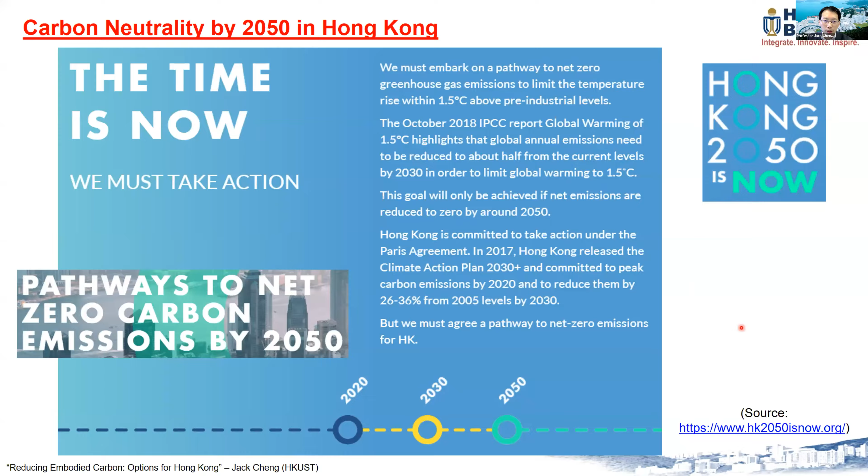To start with the topic, today we have many good speakers talking about different aspects of embodied carbon. But why are we interested in that? Many of you already know that we have a target to achieve carbon neutrality by 2050. In China, the target is 2060, so we are 10 years ahead and more aggressive. We also target to reach peak emissions by 2030. If you want to know more about the carbon neutrality mission in Hong Kong, you can go to this website.

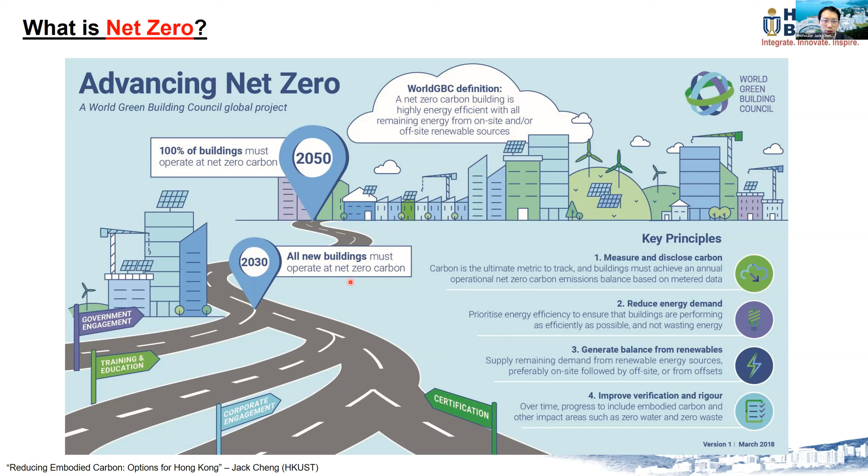This kind of carbon neutrality target or initiative is not only in Hong Kong or China—it is actually a global need, a global trend. If we look at the World Green Building Council, they have the theme of advancing net zero, with a target that by 2030, all new buildings must operate as net zero carbon. But when we talk about the whole life cycle, this is also something we need to consider. When we talk about carbon footprint, we need to look at the whole life cycle rather than only the operational carbon. What is embodied carbon? What is operational carbon?

As the first speaker today, I would like to mention that for the whole life cycle, from design to construction to facility management, embodied carbon is the carbon footprint arising during material use, raw material production, and transportation, while operational carbon is about the carbon footprint during the operation of the building.

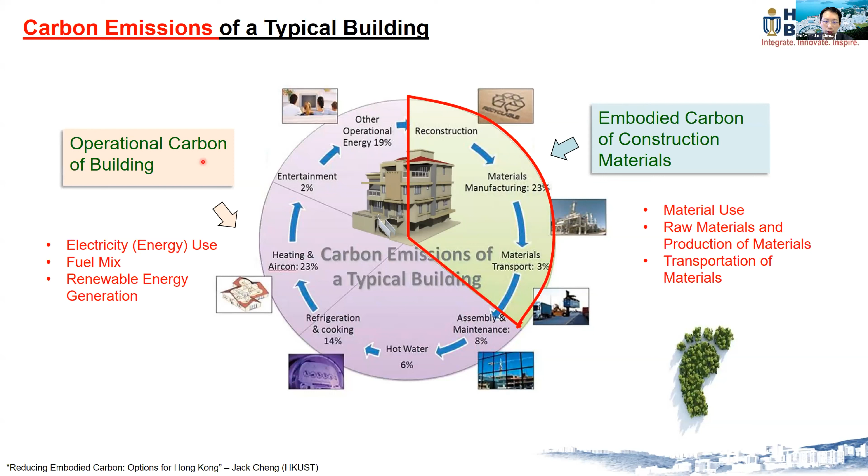If we look at another definition of the whole life cycle, we can see categories A, B, and C. A is mainly about design and the upfront stage—this is what we call upfront embodied carbon, including raw material, production, transportation, and even site work. B is the operation stage. And C is about end of life—deconstruction, disposal, etc. Those are also embodied carbon, but this is not our target. Our target is mainly the upfront one.

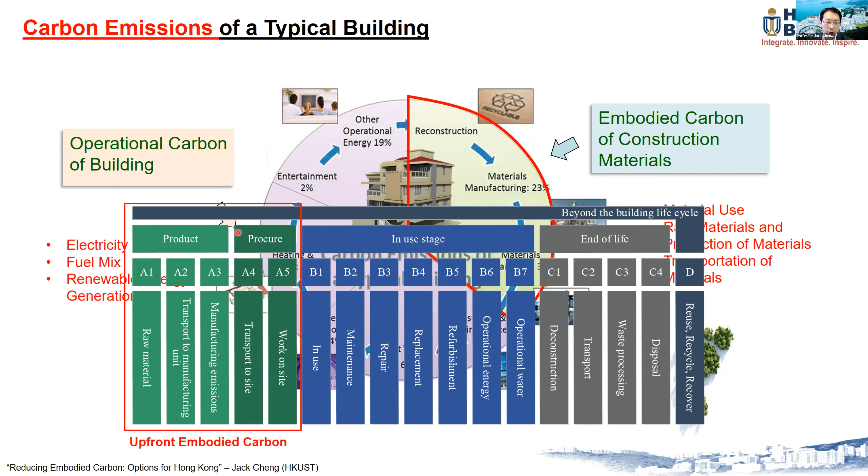That's why today I would like to share with you options to reduce embodied carbon, mainly in this scope, A1 to A5. Why are we interested in embodied carbon? If we look at the whole life cycle of a building, embodied carbon during construction would contribute about 27 to 47%. It really depends on many factors, like the construction method, etc.

But at the same time, many people try to focus on the operational carbon, how to go green, etc. But in fact, if we consider some buildings in mainland China, maybe the lifespan of a building is only like 30 years. Then in that case, the embodied carbon will be very important, almost like half. Even for a typical building like 50 years, 30% of the life cycle carbon footprint is still very important, and we shouldn't ignore this.

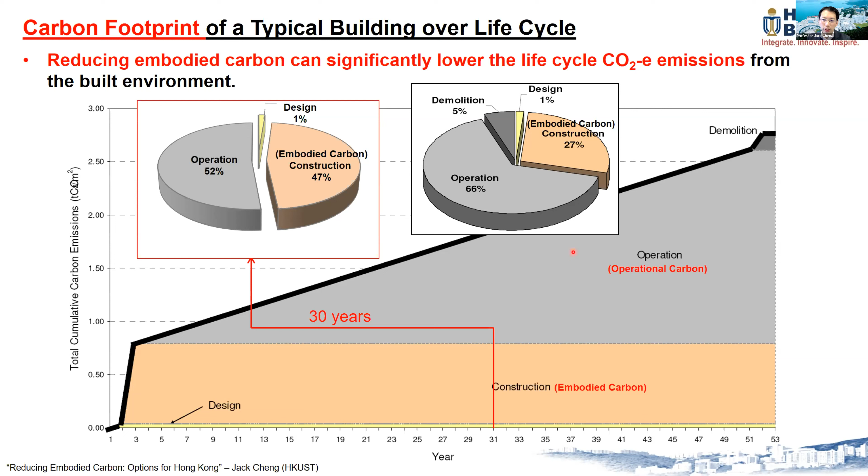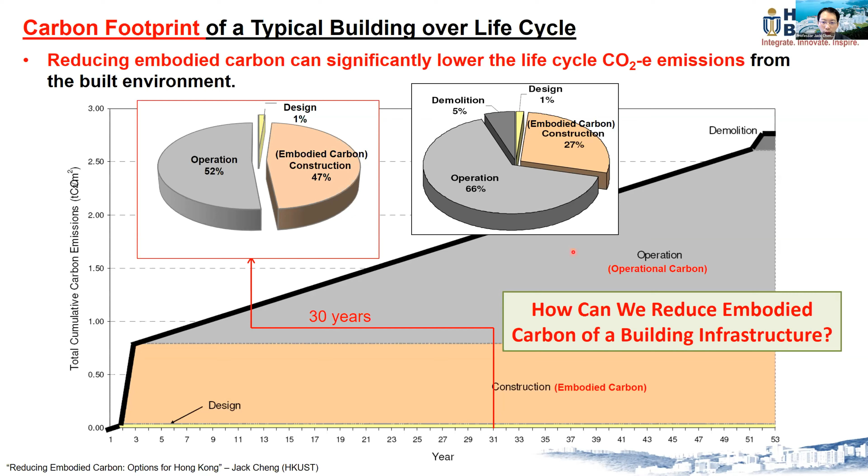So the question is, how can we reduce the embodied carbon of a building or building infrastructure in general, even like bridges or roads? What can we do? In the following, I would like to share with you some options to reduce the embodied carbon in 3 main areas: building materials, building design, and the construction part.

So first of all, I would share with you about building material. I know later there will be other speakers talking about that. For our construction of buildings, the main building materials will be concrete and steel.

For concrete, there are many methods we can use to reduce the embodied carbon. Particularly, for example, we can design the mix, the concrete mix, so that we can consider the workability, the strength, etc. We also can add cementitious substitution material, particularly fly ash, GGBS, or silica fume. Each of them has different limitations, and also supply shortage or supply constraint considerations. But they also have corresponding limits on the maximum use. For example, fly ash, we can use up to like 25-35% only.

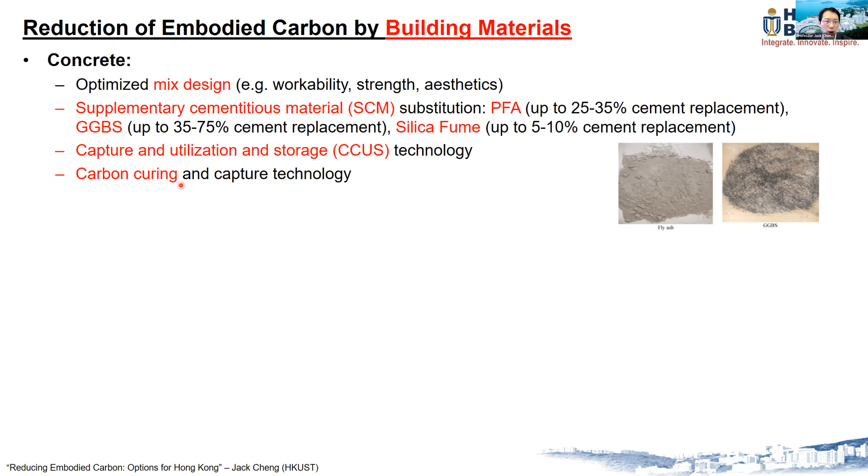GGBS, we can use more. So that's why if we push the limit and use the maximum GGBS, we can achieve a lower carbon concrete. But of course we need to consider the material properties, etc. There are other technologies, for example, CCUS, carbon capture, utilization and storage, and also carbon curing technology, which can also help us provide better concrete.

Another thing for steel, we usually compare EAF and BF-BOF. Particularly if we use EAF, the electric arc furnace, the embodied carbon will be smaller. Also, one way to reduce the embodied carbon of steel is the recycling content, and this depends on our procurement.

Another option is using timber. In Hong Kong, concrete and steel are the major building materials, but there's a rising trend that we can use timber combined with steel to have a composite building component, so that we can use it for partition walls, etc. This is something we can consider because timber has zero carbon footprint since it comes from nature, and this can help reduce the carbon footprint of the entire building as a whole.

All these are different technologies on a single material, but for Hong Kong, we don't have too many options or methods to reduce the material itself, because we don't have factories, we don't have manufacturing. For concrete, for cement, there's only one cement supplier in Hong Kong, but for steel or other materials it's usually imported. So the problem is how can we consider this in procurement?

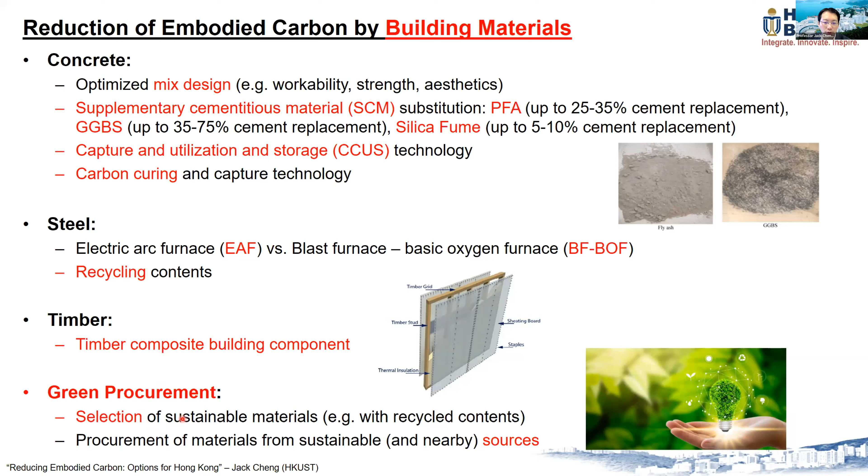So green procurement is more important. We need to know what's good, what's not good, so we can select materials accordingly and also consider the sources. Let me give you one example.

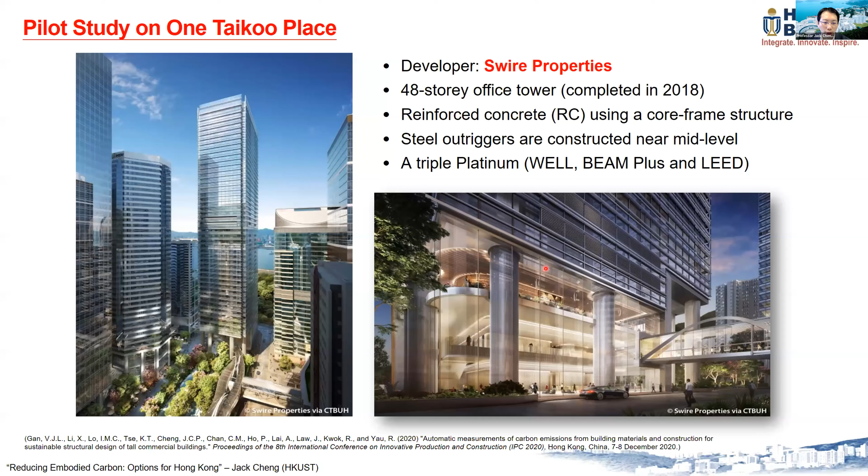We worked with Swire to calculate the embodied carbon of one commercial building called One Taikoo Place. This is a green building with platinum certification. We tried to calculate - it's an RC structure with a core frame structure. When we calculated the embodied carbon, we found that materials contribute 96%, among which transportation contributes about 5-6% of the embodied carbon, and concrete contributes 30%. Rebar contributes 52-53%, so all the steel altogether contributes about 56%. Then glass and timber make up the remaining.

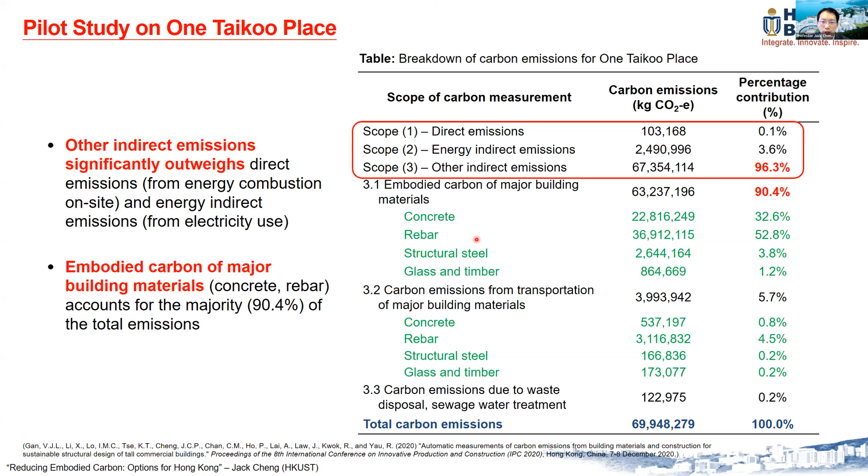We can see that's why if we can reduce the carbon footprint of concrete and rebar, then we can really reduce the embodied carbon of the building.

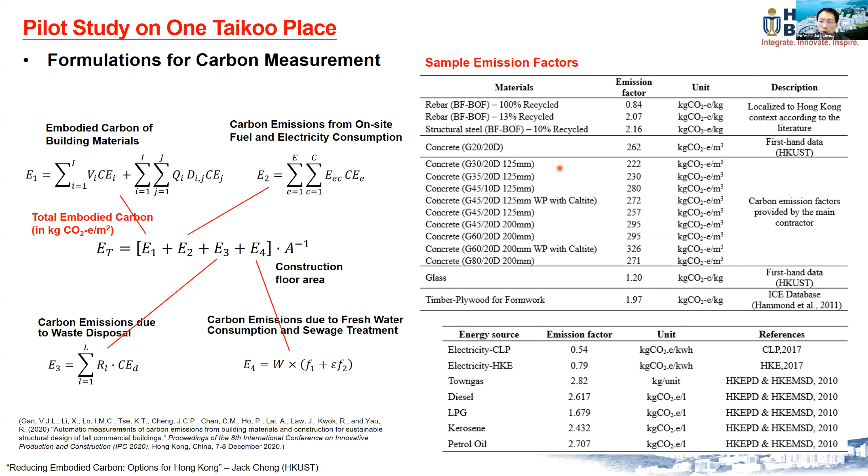These are some more information about the emission factors that we use, and we actually consider the local embodied carbon emission factor. This one shows that if we consider recycling of steel, and if we consider fly ash and GGBS, then we can have some reduction in the embodied carbon.

For example, the current design number is 575 CO2 equivalent per square meter. If we use 35% fly ash, then we have 11% reduction. If we use GGBS to the maximum, 75%, then we can achieve 21% reduction. If we use 30% recycling, we can reduce 4%. But if we go to 100% recycling of steel using EAF, then we can achieve 34%.

If we do both, then basically it's the sum of these two numbers. So this shows that if we try to select or use low carbon material with the same design, then we can achieve almost 50% reduction for embodied carbon of a typical building. This is something for us to think about.

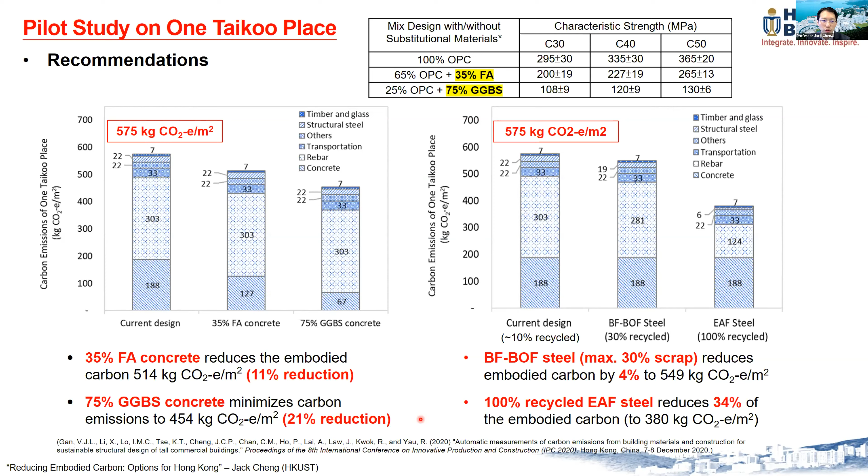And with that, digitalization can help. Later, I will show you some examples.

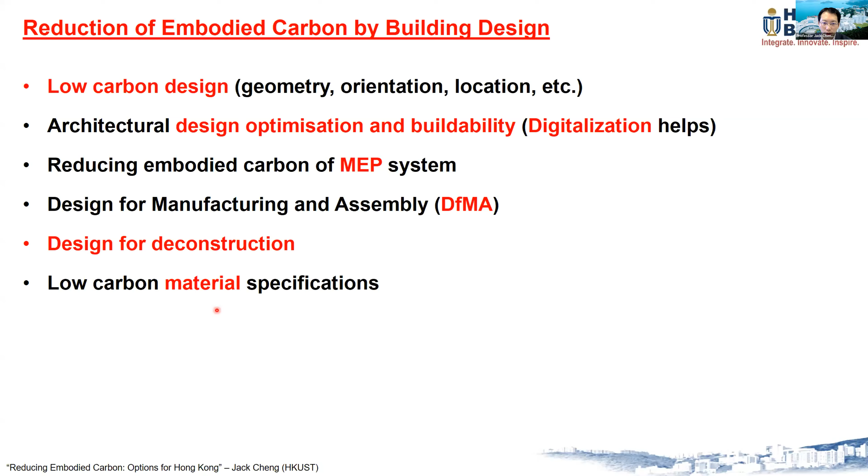Particularly, I want to share with you how digitalization can help us have better design. I think many of you may have heard of building information modeling, BIM. With a single building model, we can support different analyses, for example structural design, ventilation design, material design, etc.

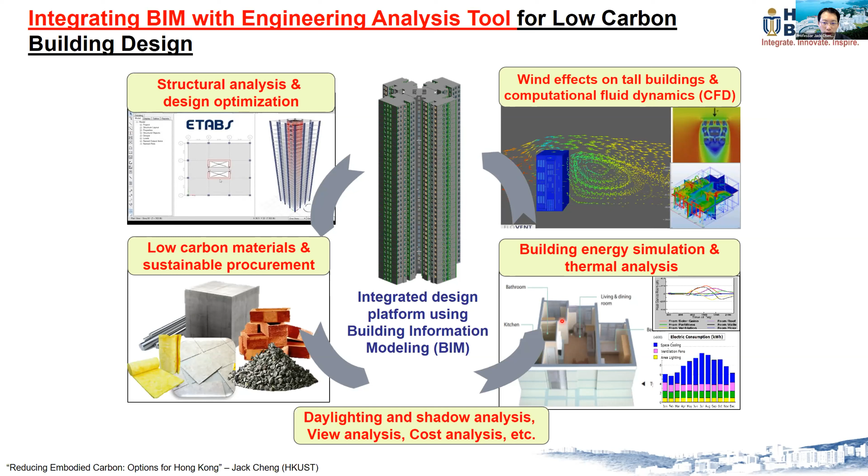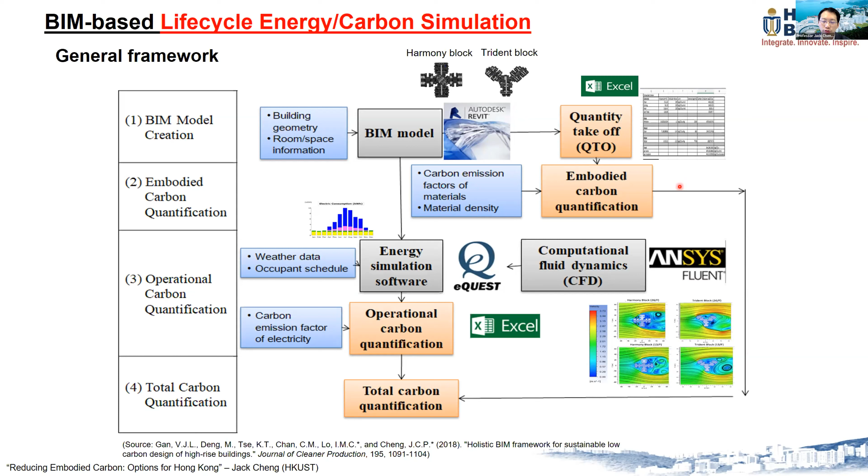We have studied this using a single BIM model, and we consider the embodied carbon and also the operational carbon, then we can have total life cycle carbon optimization. For embodied carbon, the approach is that because BIM is object-based, we can know the amount of different materials, for example concrete, etc. With that, we can do the quantity take off and consider the emission factor, then we can know the embodied carbon.

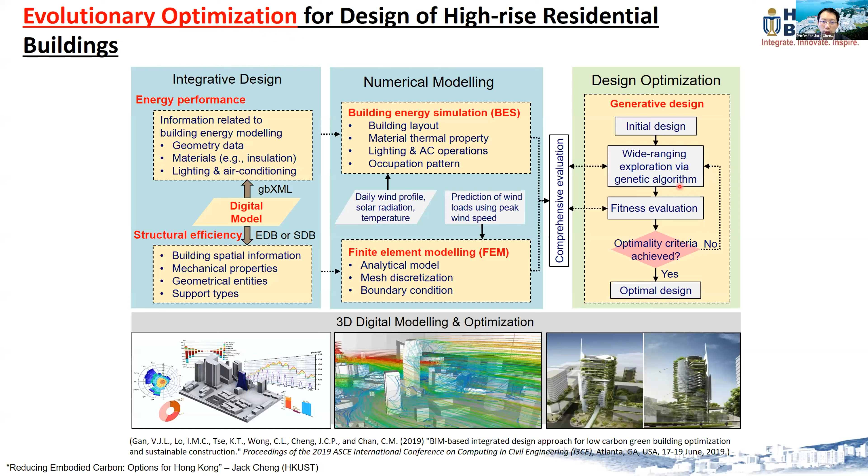With that, we can consider this as the objective function and do some generative design, generating many different alternatives using parametric modeling. For example, we can have different permutations and ask the computer to tell us what will be the embodied carbon for that design. We try to select the best one with compliance to code and also the requirement of payload, etc.

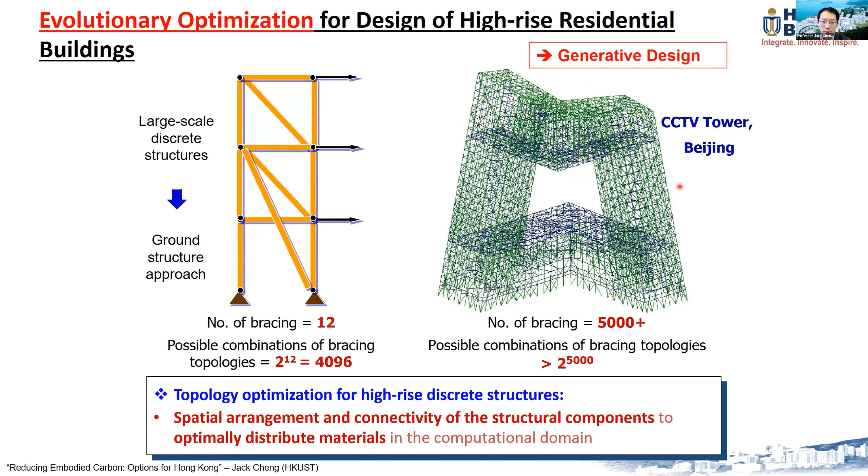With the BIM model, we can also consider different materials. For example, we can select different low carbon concrete, with different materials. For concrete, we have C30, we have C60. C60 has double the strength of C30, right? But in fact, the carbon footprint is not double. So if we use high strength concrete, even though we double the strength, the carbon footprint actually is less than double.

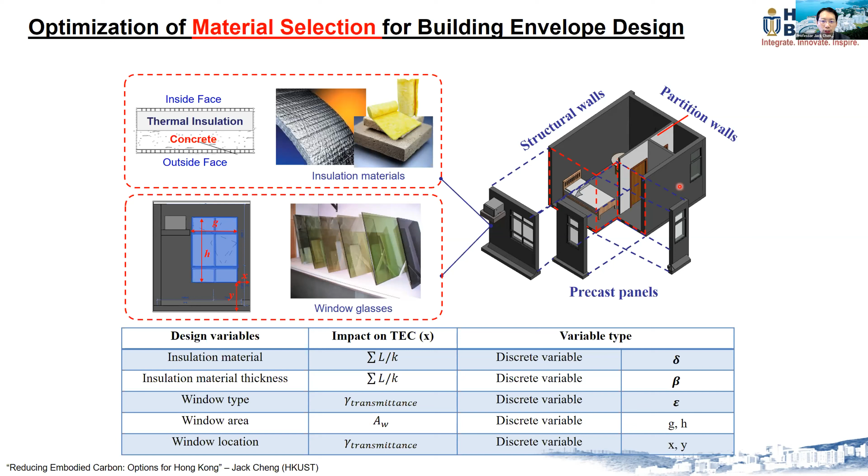It means that with this consideration and this model, I can consider using high strength concrete and then reduce the member size—what will be the changes in the embodied carbon? Digitalization, or this digital model, can allow us to do this kind of assessment.

Another thing is when we do the design, we can consider, for example, what are the partitions, so that I can still have the same structural strength and performance for the building, but use fewer materials, fewer partitions, etc. With better design, I can reduce the use of material, and in a sense, reduce the embodied carbon.

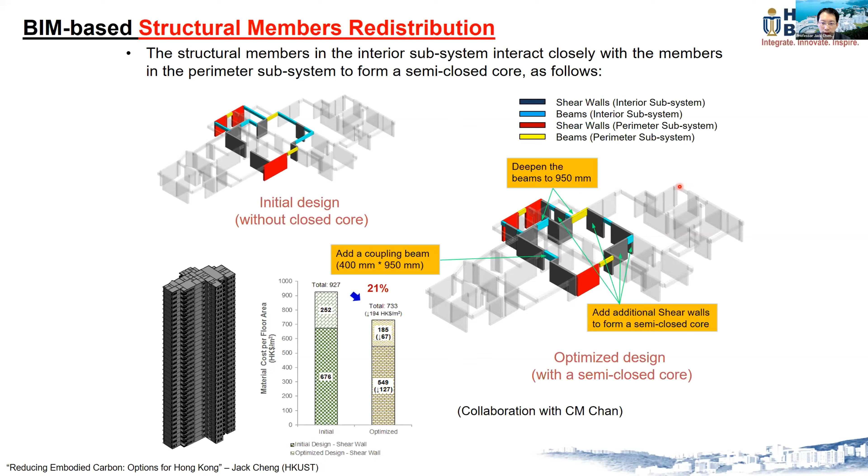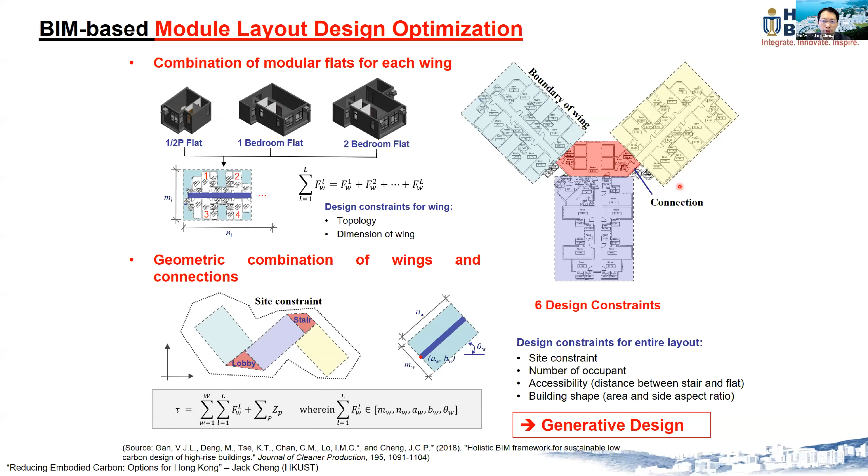We talk about modular design. So our team also tries to consider the selection of the module, the orientation of the module, so that we can have better ventilation and also fewer materials used, and digitalization can allow us.

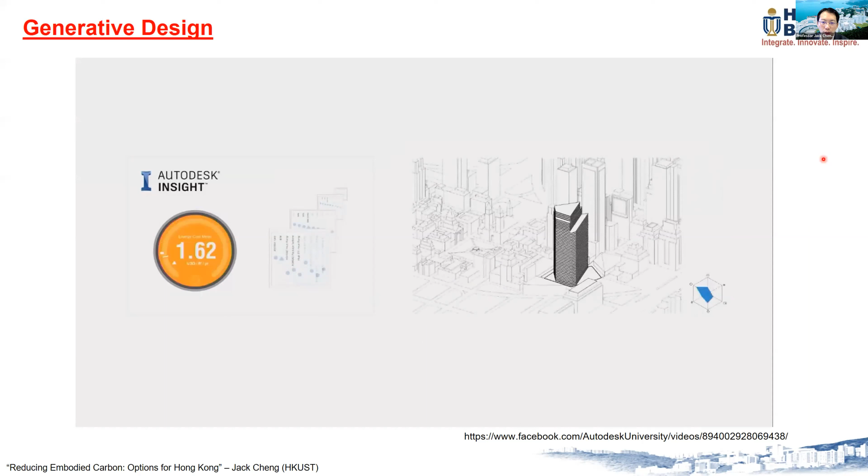This one shows an example that with BIM, in the preliminary design we can already consider many different kinds of geometry, and then we can see what will be the carbon footprint of the building. With this kind of idea, we can quickly consider many options, and it can help us have a better design.

And then we can consider maybe a different building shape, building size will affect the embodied carbon. And the last part is about construction.

For construction, basically we are talking about A4 and A5. For A4, it's about transportation to the site. For this, we can consider what will be the logistic planning. We can select a better route so that we don't need to travel a long time.

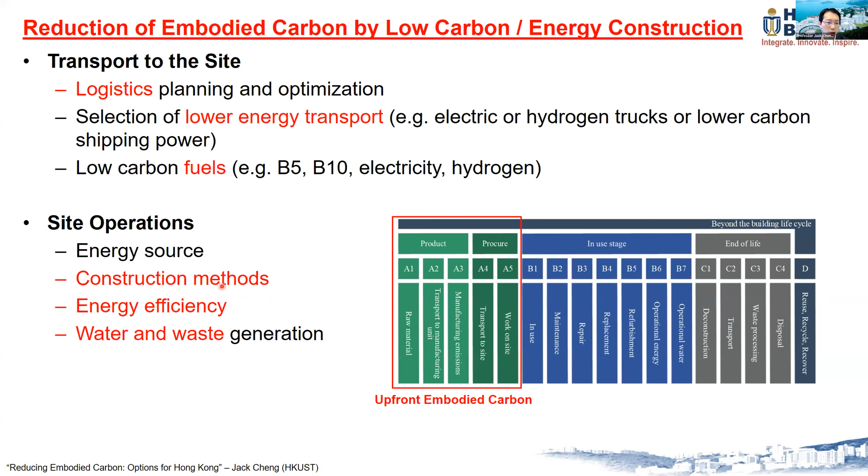We also need to select the transportation mode, since land transport may not be as good as ship transport. We can also select the transport means, for example electric trucks, and also the selection of the fuel, for example some biofuel. For site operation, we can also use biofuel, and also consider the construction method or some kind of waste management, etc.

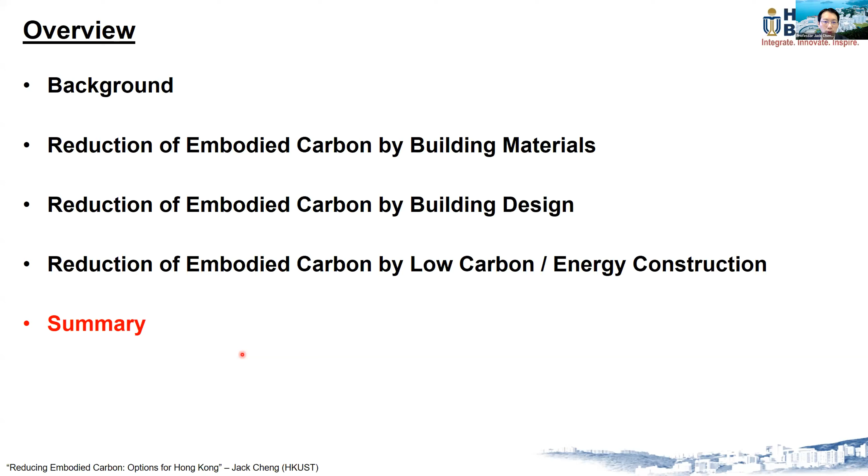Build nothing doesn't mean that we just don't build anything, but means asking whether the building is really needed, or whether there is any situation where we can integrate, or use existing assets to do so, and still fulfill the city's need, the demand. So this is something that we may consider.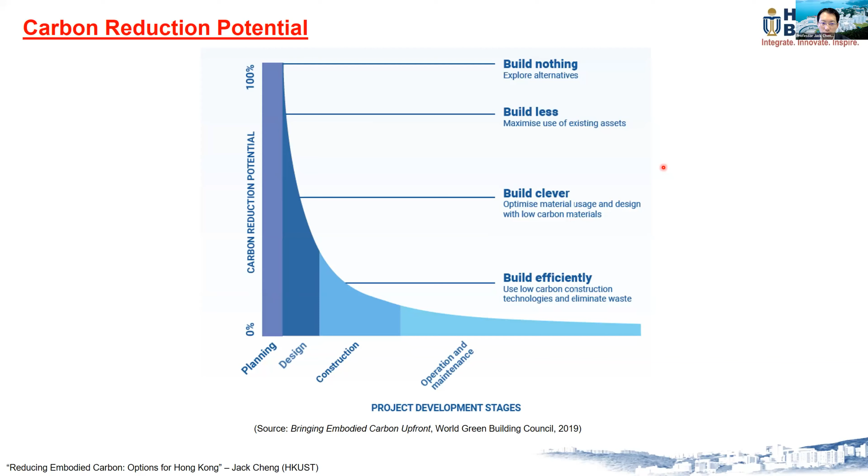Another thought is that we may also need to have some kind of measurement of the embodied carbon. While we try different techniques or approaches to reduce embodied carbon, how good are we really? We need first of all to have a baseline. We need to first of all know what are the values or the emission factors for different materials.

But the tricky part of embodied carbon is that it's region specific. The same material produced in Hong Kong will have different embodied carbon than the same material produced in, let's say, Japan, because we have different fuel mixes, and we also need to consider the transportation. That's why there's a need for establishing a local embodied carbon inventory database.

Right now in Hong Kong we don't have such a database, but we can see that in Switzerland, in Europe, and in Korea they have such a database, though most of them do not focus on construction materials. That's why we, HKUST, tried to establish a database, but it actually requires collaboration across the whole industry to do that.

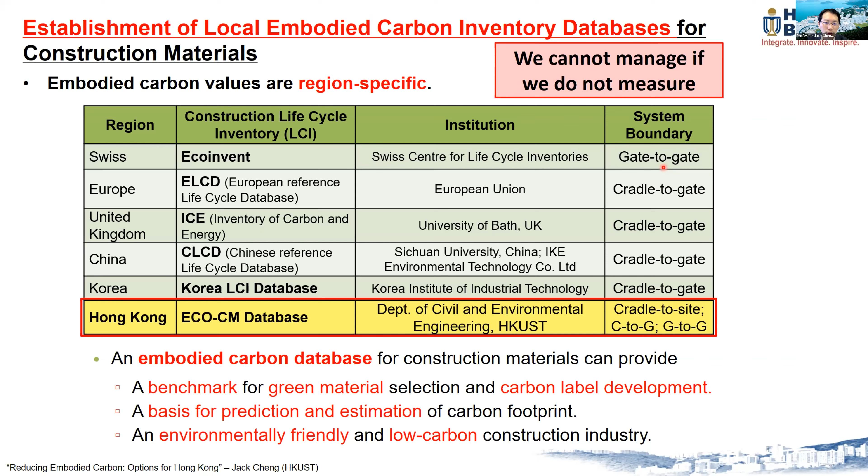And now in Hong Kong GBC, we are also discussing something like that. So hopefully we can really have a local database so that the whole industry can use it as a baseline, as a reference.

Another thing to consider is: we now measure, but how good are they, or what would be the target for reduction? There are different kinds of baselines or even targets for embodied carbon in different regions or countries. Take London as one example. London has LETI, they have the baseline, and also they have the target for what would be the embodied carbon of buildings. In Hong Kong, in fact, we are also internally considering what will be the baseline and also what will be the target.

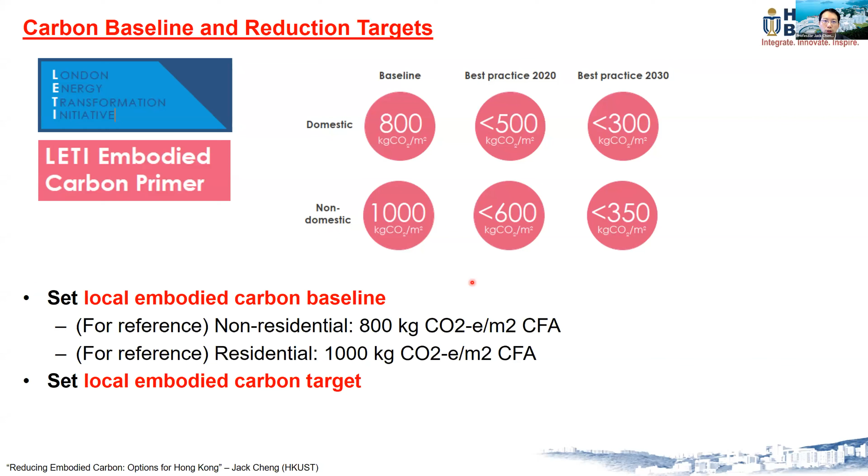Okay, for example, we hope to have a target by 2030, 2040, and 2050. And by 2050, hopefully we can achieve zero. These are the numbers we still need to consider with reference to many buildings. So this is what I would like to talk about or share with you regarding the options of reducing embodied carbon for Hong Kong. There are many things we still need to do, and hopefully we can work together to achieve that. Thank you very much.